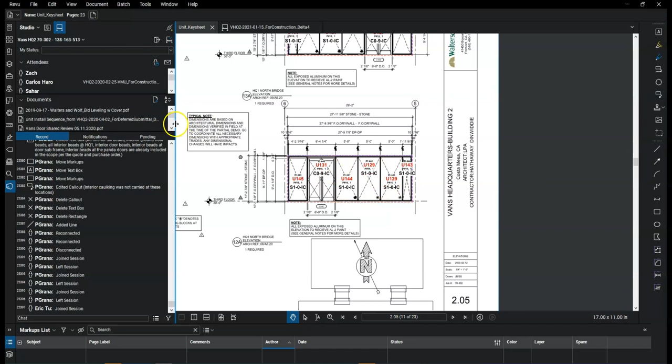What you want to do is open up your Bluebeam session with the shop drawings open, as well as the key sheet, so we're going to identify where the unit stands or where it's located. In this case it's on elevation 12A on sheet 205. It's the intermediate unit, so unit 129 is right here.

So let's go over to your shop drawings, it's these 2 units right here. What I normally like to do first is just look at the details, right? Let's confirm it's using the right details.

So we can see that the sill detail is 1 on 505, and then 1B on 505. Let's click into that first and see what's the difference.

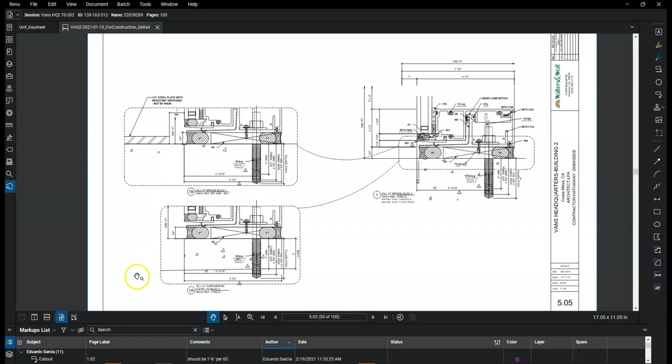So there doesn't seem to be much of a difference, maybe an added steel plate. Anchoring is all the same. The sill, if they're going to cut down over here, there's nothing to do with the sill member, so it's safe to say that it's the same sill member.

So let's go over to 1A on 505A. It looks like the 1A condition is just the perimeter, so it doesn't change anything. The reason I'm looking at this first is to just get myself accustomed to how the unit will look.

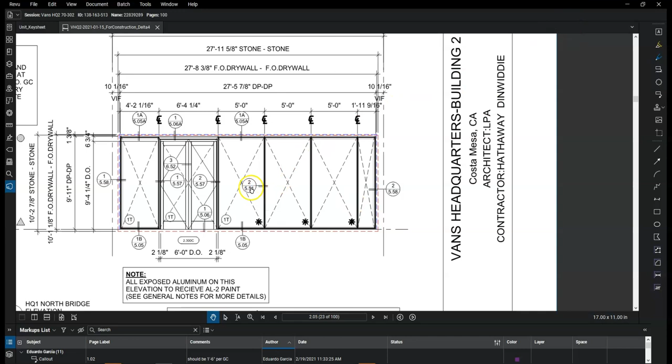So your detail for the verticals is 2 on 551, 2 on 551. Nothing special, just your typical invisible vertical detail. Let's move this over to your left side. For you it should be a little easier because you have 2 screens, but for the sake of this recording I had to move back and forth.

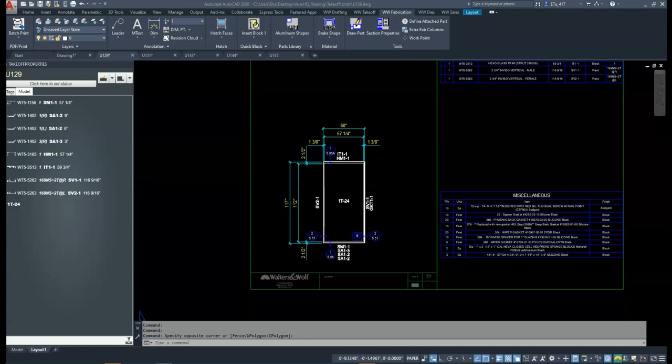So if you take a look at the detail bubble, it's calling out 1 on 505A at the head. The shop drawings show 1A, but 1A only shows the difference between 1A and 1 is just the perimeter, so we can go ahead and just say this should be fine.

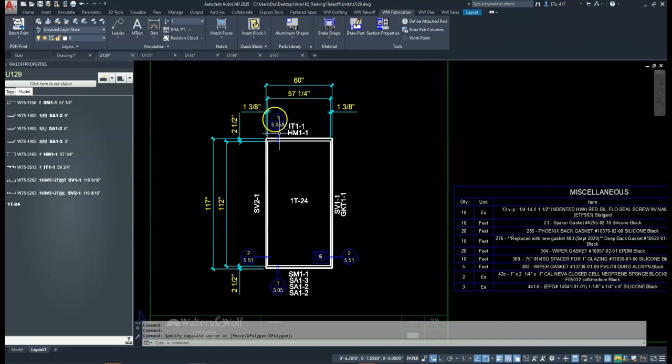1 on 505 is at the bottom. The difference between 1 and 1B is relatively the same, there's really nothing, so we can go ahead and confirm that 1 on 505 is an okay detail to reference, and also the verticals are 2 on 551.

Okay, so we have confirmed that the detail bubbles we're working with are okay, so we'll just go with that. Now we're going to check if the correct parts are being produced.

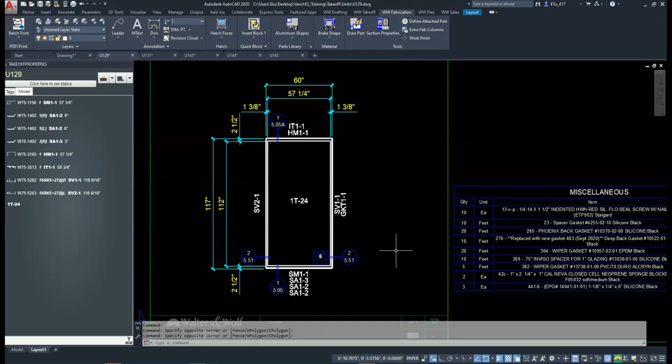So let's go into the model space first. I like to just check the horizontals first. If you remember, the command VPE brings you to the side.

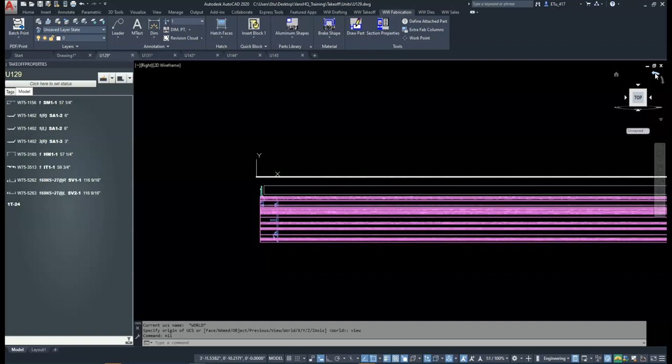It gives you a nice view of how our horizontals are usually cut. This is laying flat. If you want to make it look like it's resembling our details, you can rotate it over here in AutoCAD, so now it's standing vertically and looks more like your detail.

I'm not going to show the shop drawing side, you should already have the shop drawings open on one side, so I'm just going to guide you through it.

On your shop drawing side screen, you should click on the sill detail, which is 1B on 505. And in here, let's look at the extrusions being produced that tie with your sill member detail.

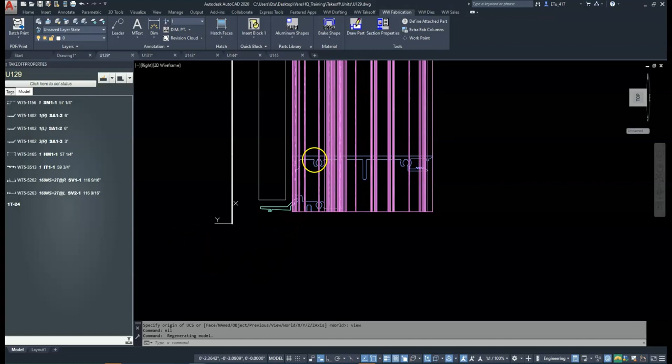So you can see that the W751156 is your sill member. It's right there, very apparent. So 1156. Okay, what else do we have?

We have these little setting chairs, this is W75 1402, which is shown on your shop drawings. You should see it towards the exterior of the building, 6-inch long at quarter points.

So is there anything else? Don't think so, in terms of extrusion, so we can confirm that your sill member is taken off correctly, it's at least the part is there. So we can confirm that.

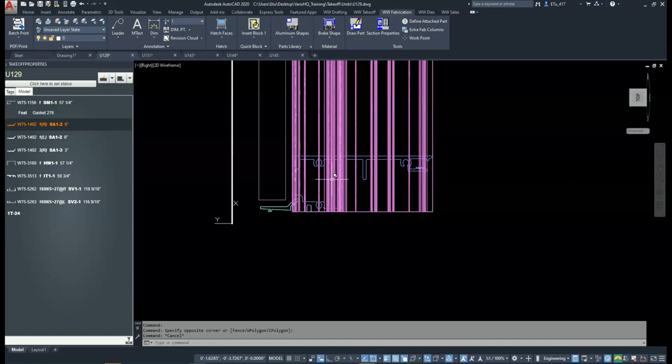We can come back and confirm the size later. So let's move over to the head, let's highlight the head, and let's go over to your shop drawings.

So your head detail is 1A on 505A, so click into that. So you see here, our main body is the W75 3165, it's called out there towards the back of the detail.

Towards the front, we have a trim. It's part W75 3513. Okay, so those are confirmed. We're good.

And you may look at W75 3608, which is your mini Mac, and then you have your other filler piece. You may wonder why it's not shown on a unit, and that's because these parts we just mentioned are few-use parts. Few-use parts belong on key sheets, elevation key sheets, while anything you want the shop to assemble shows on our unit assembly drawing.

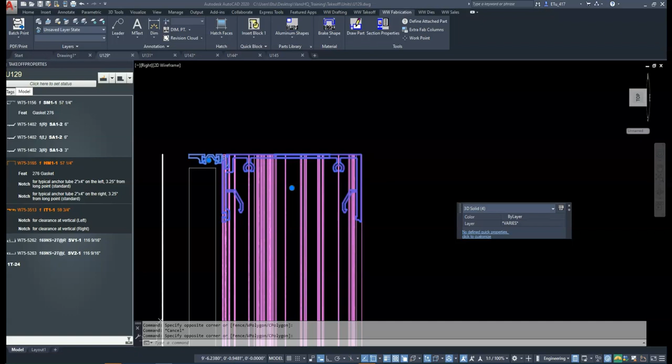So with that said, the head is good. Now let's check our verticals. The other command to make it quicker is VPF, which brings you to the front view. Just remember that.

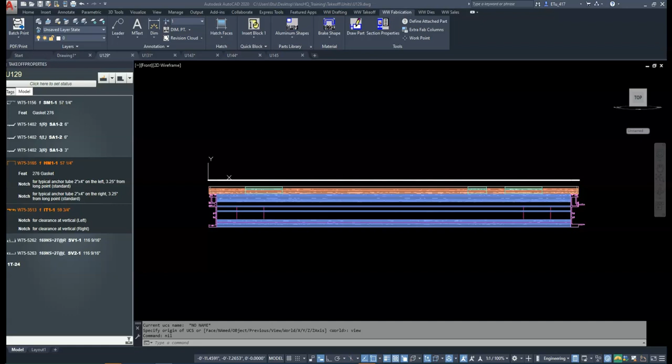So let's go over to your shop drawings, go to detail 551. Let's highlight the left side of your unit, which is your female part, W75 5263, compared to your shop drawings. Remember, this is the left side of your unit. That's confirmed, that's good.

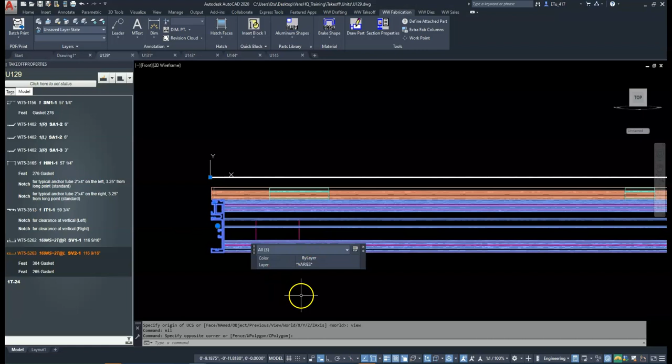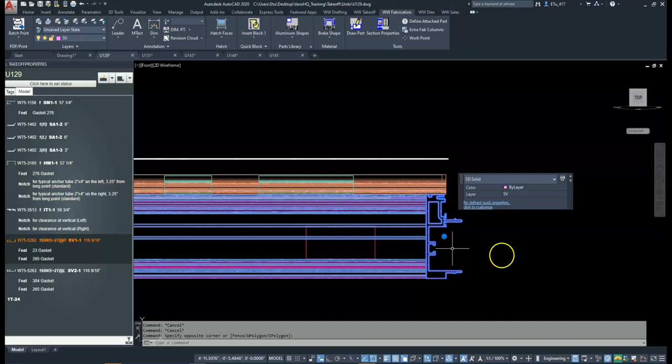And now the right side of your unit, which is your male side, is W75 5263 -- excuse me, the detail for your male is W75 5262. So with that said, this unit has all the right parts built into it.

Now you can kind of play like a caveat, going back to the head. If for some reason your filler and your mini Mac need to be on a unit, then you need to show those parts here. But this just gives you another idea of how those two worlds work between units and few-use parts.

And again, we're focusing only on metal: extrusions, angles, and whatnot. When you see parts like fasteners, they're not going to show in the BIM model. Gaskets, normally we don't show those as well. So it's not going to be extruded onto the BIM.

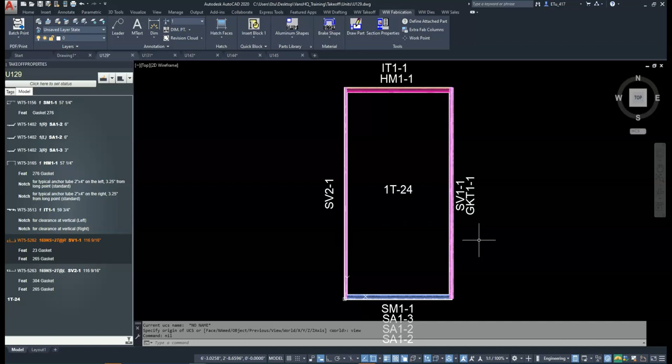Okay, so next we're going to move on to how to use the dimensions shown on our unit assembly drawing and compare it to the shop drawings to check for metal.

So with this one, I'm going to be using the shop drawings, jumping back and forth, so you're going to have to bear with me. So to start, let's confirm the dimensions shown on our unit assembly drawing. Go back to paper space.

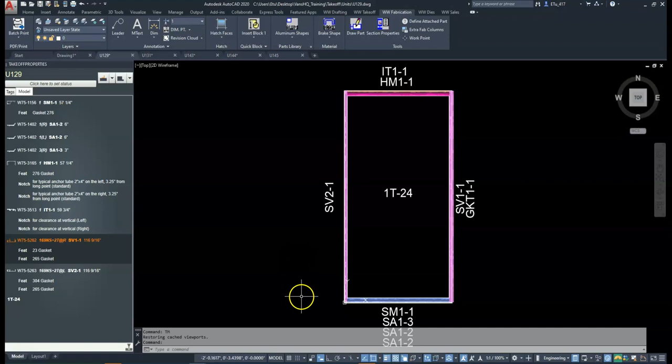Okay, so while in paper space, you can see there are dimensions here. You'll see an overall vertical dimension of 117, and then you have the 2.5, which is your profile of your horizontal, and then you have your daylight here.

And then horizontally you'll also have your daylight, your vertical profile -- not necessarily vertical profile, but profile in relation to how the Revit family is drawn.

And then your 60-inch overall dimension -- that dimension shown here is usually your dimension point to dimension point, or what I like to refer to as your Revit insertion point for the families. So for now, we're going to start with confirming the vertical dimensions: your 2.5s, your 1 and 112, and then your 2.5 on the head, and then the 117 overall.

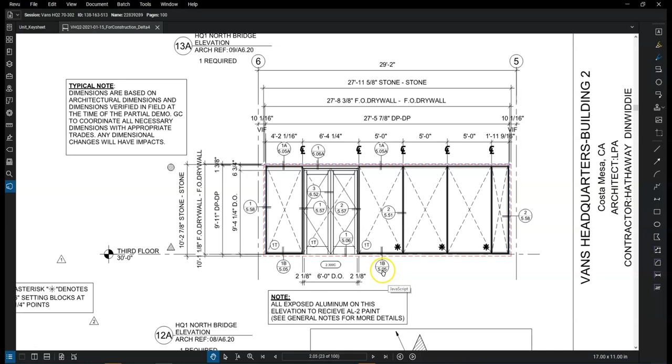Okay, so let's take a look, I'm going to actually bring over the shop drawings here. If you take a look at this sill detail, the profile here is shown as 2.5. So now remember what I said, it's...

...to the Revit insertion point of the family. So for the sill family, the Revit family is usually 7/16 below the bottom of this sill member, or I like to call it bottom of vertical. So in this case, it's 7/16 below that, which is why you see the program drawing the profile as 2.5. So we're confirming that -- it's 2.5.

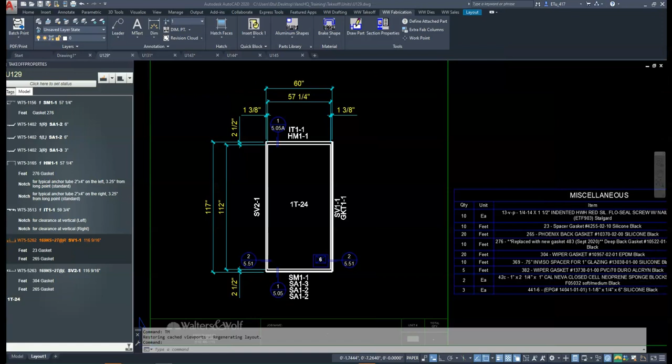So let's go back to this guy and confirm the daylight now. Let's go back -- the daylight is 112. So let's go to your elevation.

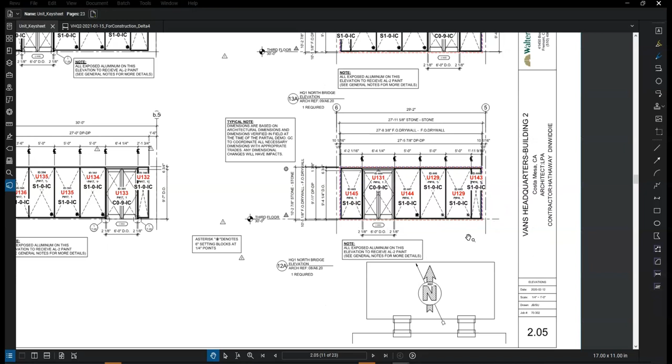Okay, so this one you may want to pull up a calculator, it'll help a lot. So pause for a sec here. Now that we have pulled up the calculator, we can start calculating the daylight of our opening on the unit assembly drawing.

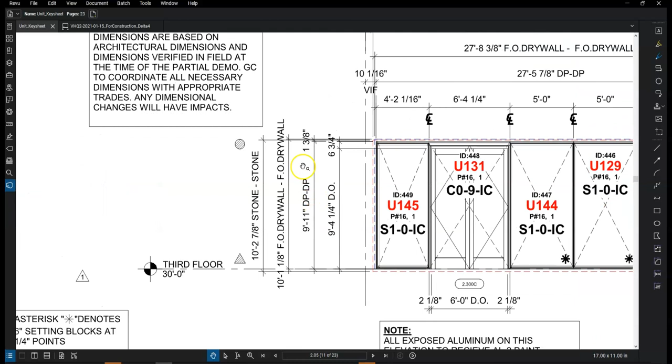Okay, confirm that 112. So here we're going to be using specifically this dimension right here, your DP to DP. So with that, it's going to be 119 inches, or you can just do 9 foot, so 9 times 12 is 108, and then you plus the 11. So 119.

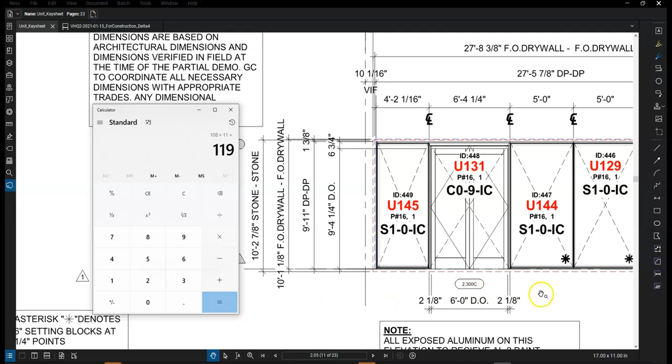So next, oh sorry, that's not the shop drawings -- same thing. So next we'll have to open the sill detail.

So with the sill detail, remember the DP is right here, your dim point, going all the way down to the floor. So we want to get to over here, it's your daylight -- just to give you a visual, this is your DP, and we're trying to get to over here, just in case you don't know. So you want to subtract 3/4, then subtract 2.5.

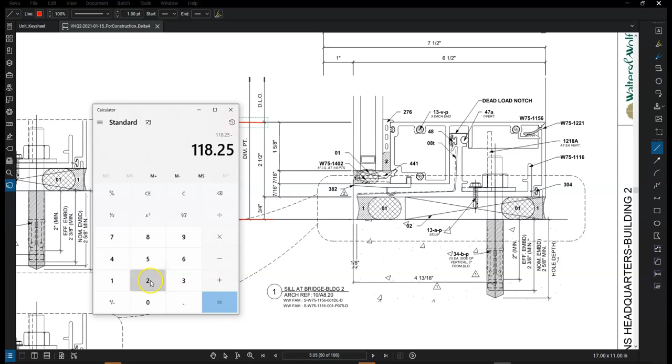Let's do that again. Okay.

Okay, so we go back to the elevation, do the same for the head. Pull up the calculator. So here you have your DP, and then you're trying to get to where the daylight is, right? So you want to deduct.

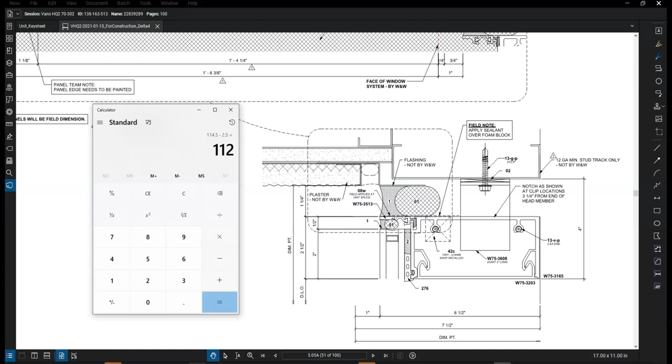1.25, that's your joint, then deduct 2.5. So 112. Let's open up your unit assembly drawing again and confirm 112. So now we have confirmed your daylight, your profiles, and with that your overall should also be correct.

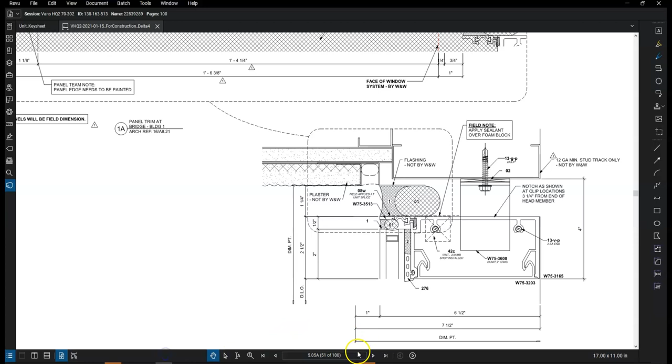So next we're going to confirm the horizontal. The horizontal is the same kind of theory, just open up your vertical details instead. So let's go back to your elevation. So these are units, so from DP we can do center line to center line, which is DP to DP, is 5 foot. So 5 times 12 is 60 inches.

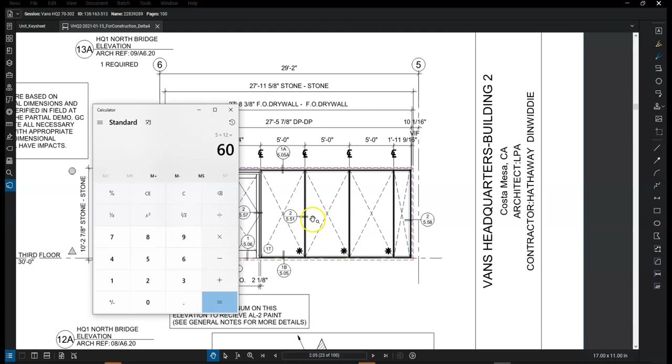This one should be a lot easier. So again, your dim point is right here in the center. That's where your tagline is inserted, that's where your Revit insertion point is for your tagline.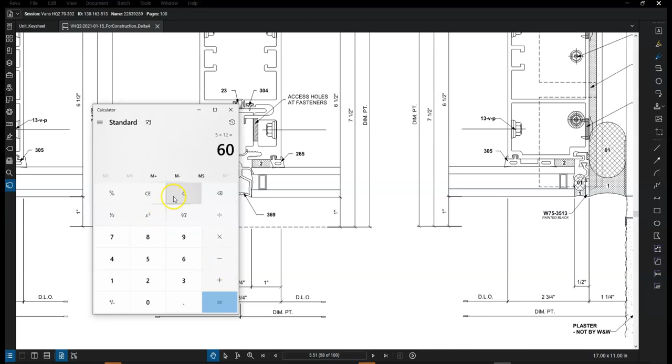Okay, so we know the profile is 2 3/4. So keep 60 there first. So we know the profile is 2 3/4, so you would deduct half of that on one side. So you can do minus 1.375, that's 1 3/8 on one side, and then you do another 1 3/8 on the other side to bring in daylight. Or you can just deduct 2 3/4, right?

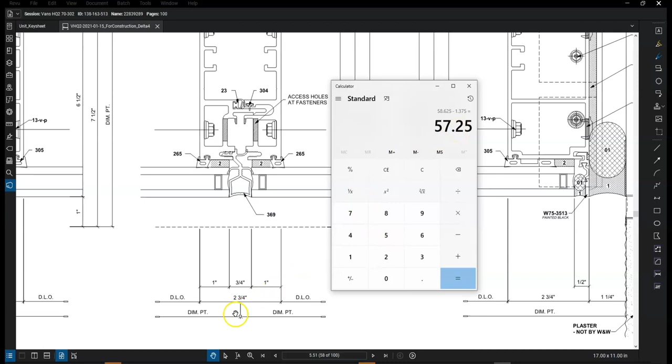So this is your daylight opening for your horizontals, which is 57 1/4. So let's go check 57 1/4. So now that you've confirmed all these numbers, you can go into your model space and highlight these parts. So what I like to do is go off of the horizontal first, since we last checked that one. Just highlight the sill member.

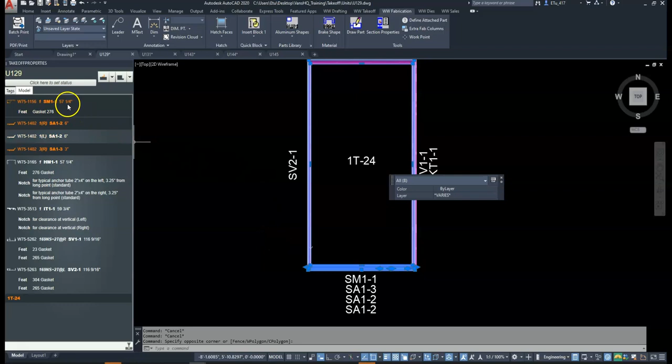Your sill member is stopping daylight. Remember that it doesn't go past your vertical. So 57 1/4 is correct, right? And then your head is also 57 1/4.

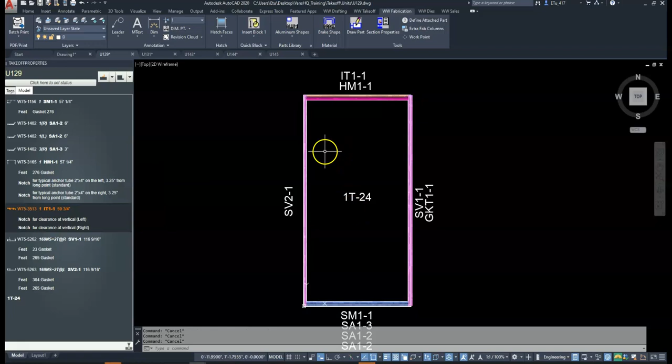And then your trim, the logic there is you want a 1/4 inch joint in between the units. So then you're going to be deducting 1/8 inch on the left, 1/8 inch on the right, to be a 1/4 inch in total. So remember, your overall dimension is 60 inches. So 60 minus 1/4 is 59 3/4. So the trim is confirmed, your head is confirmed, and your sill member is confirmed.

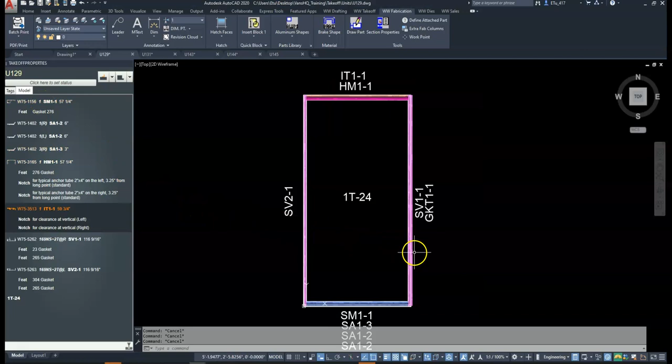So now let's go in and check your vertical. Okay, so your vertical, all right, let's go back to, okay. So your vertical is rather simple. You can use the overall dimension again, so 119.

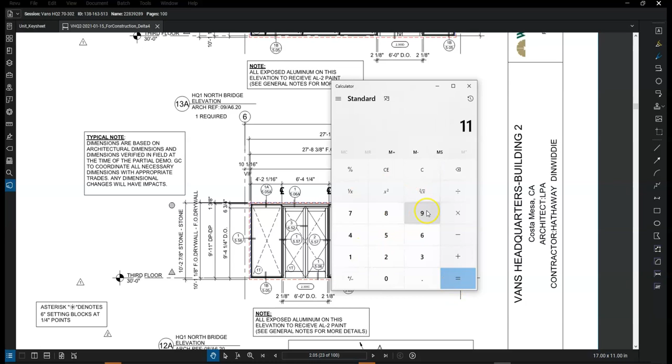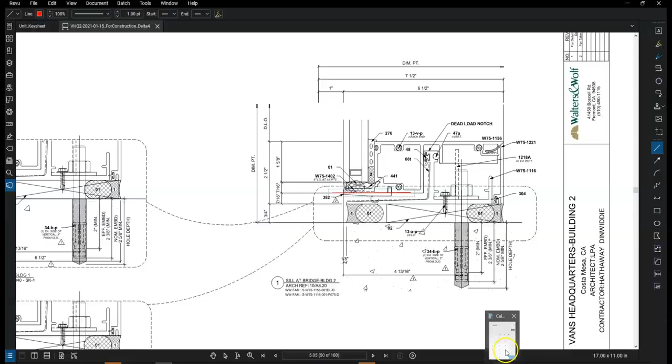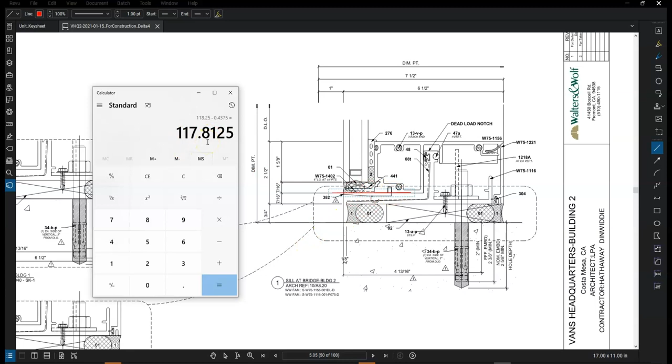119. Open up the sill detail. Now you need to know where your vertical would stop. So our W75 system, our vertical just stops in line with the bottom of the sill member here. So luckily we have these dimensions to plug in to help us find the bottom of vert. So just subtract 3/4, then subtract 7/16 for this number right here to get to that point. Minus 0.4375. So now we've got to the bottom of vertical, right? There's 117 13/16. Okay, so now we need to compute the top of vertical.

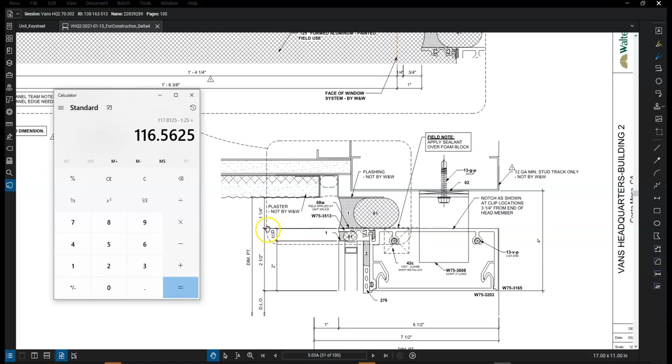All right, go back to your animation. Click the head detail. Okay, so now again we're over here. So you want to deduct 1.25 at least to get the joint out of the way. And for here you would stop the top of vertical right at the top of the head, so right here. So the only deduction to take is the 1 1/4. So that gives us 116 and 0.5625, which is 9/16. So 116 and 9/16 inches.

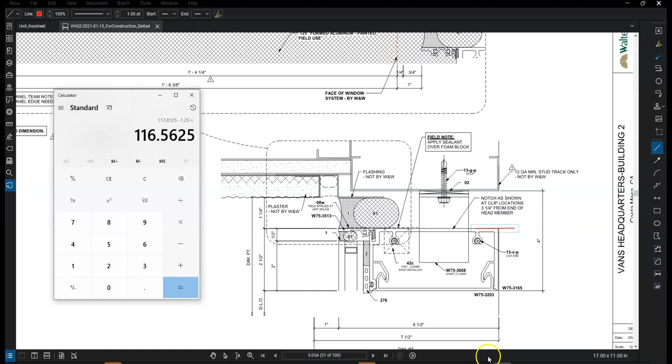So we can confirm that by going into our BIM model and highlighting. You can highlight on this side view. So 116 and 9/16. So with that, we have confirmed the correct parts are being shot out for the BIM model, and also the correct cut sizes for these parts.

Okay, so with that knowledge now, I want you to apply it to the remaining units that we already created out from the Revit, so 4 more. I want you to check if the correct parts are there, the correct size, and more importantly, the right quantity too. Okay, so I'm going to pause the video here, and it will come back, and then we can back-check each other's units, and you can confirm whether your sizes are correct, whether your quantities are correct, and whatnot.